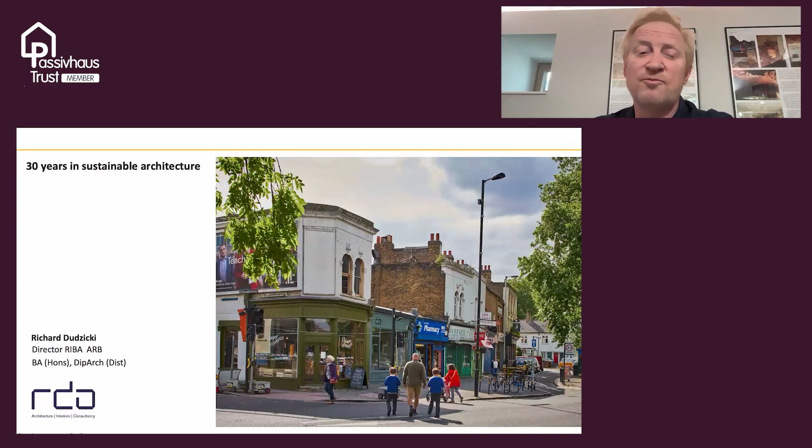We've been on our sustainable journey for the last 25, 30 years. I started building and working with the Passivhaus Trust back in 2011, 2012, when we built our first passive house. Before that, we were working with code level buildings in Harlow and so forth. So we had worked with sustainable buildings, but I hadn't really known much about passive house.

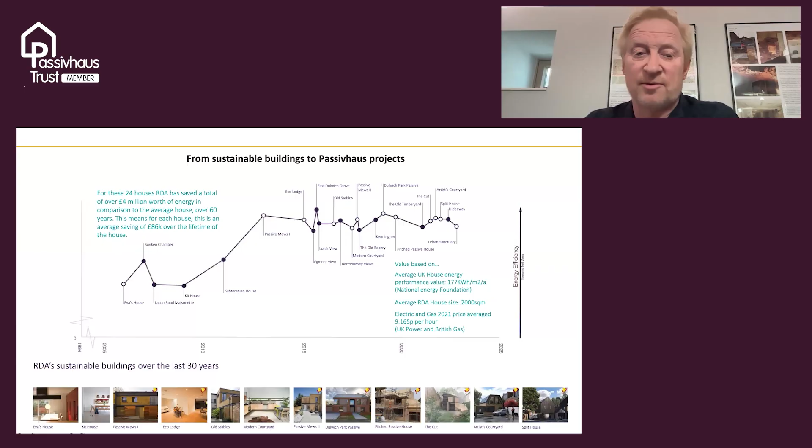When it came to building our own house, as our teenage kids were getting older and larger, we were rattling around in a 100 square meter home, a little bit less than that. It was too much when the kids were around 13, 14. So we decided to go on a planning journey with planning permission and make an application to convert our old offices, because we couldn't afford to move really, and that was the only building we really had.

I bought that a few years ago, and my daughter was born there actually. What we ended up doing was going on the journey of trying to convert that and make it a larger space. So that took a number of years fighting for planning.

Now, this slide is about EnerPHit. It's quite important about primary energy costs, and it's something I do believe quite considerable. A lot of our building stock needs deep retrofit. This particular office was derelict - it was really getting to the point where the roof was leaking, solid brick wall, and it needed a lot of work. Just working out some very simple calculations, we worked out that over a course of 60 years, we could actually save ourselves around £86,000 in energy bills by going for a deep EnerPHit project.

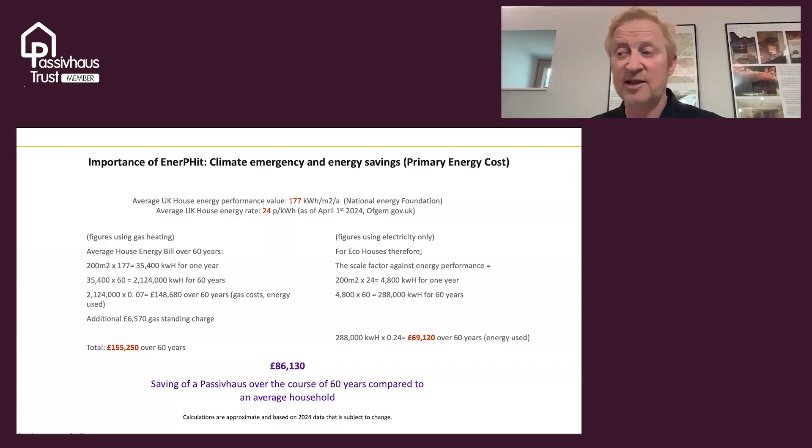An EnerPHit is different - it's effectively taking an existing building and converting it. One of the things that LETI, which is an organisation of consultants effectively, are trying to do is shift the peak of energy demand of the housing stock, in London or well, not just London, but all over, and trying to shift it over to be more ecological. It's something I wanted to contribute to, and also my partner and my kids, all of us were very keen on this. So it's something that the whole family embarked on as a project.

There's many trepidations with this. So what did we read about?

We looked at RIBA's Passive House Overlay, the RIBA - Royal Institute of British Architects - Climate Challenge, trying to reduce the energy, and LETI's Climate Emergency Guide and so forth. We were using this sort of literature to try and ensure we all had the same idea.

When I was a student, many years ago, I studied architecture in Liverpool Poly in the 80s. And I remember we used to go to CAT, the Centre for Alternative Technology in North Wales. It was very much a bunch of people listening to Pink Floyd sitting around composting toilets and so forth. But look at it now - there's definitely been a change in the ether and the air. Those pioneers did something - they did something to me as well, because it's something that I believe in.

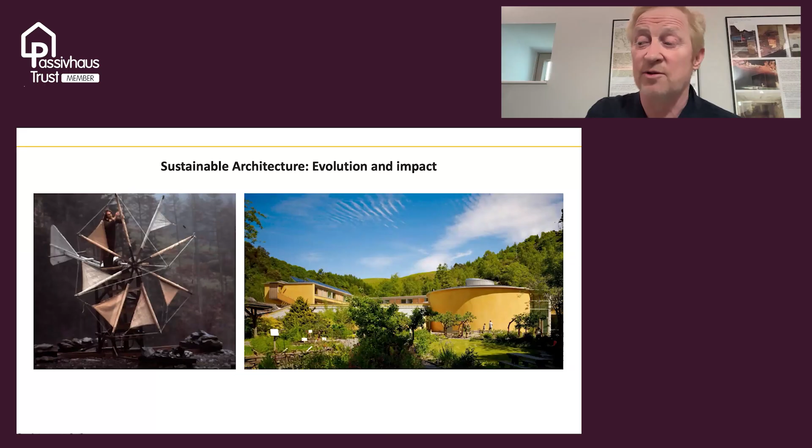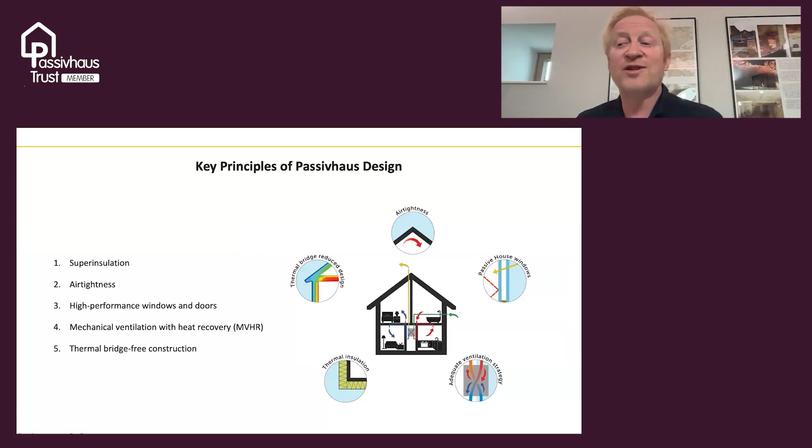So, what are the key principles of passive house design? Well, the key principles are: insulate your house well, make sure it's airtight, create and put in high performance doors and windows, include mechanical ventilation and heat recovery, and ensure you have thermal bridge free design. That means you effectively have a tea cozy over the building.

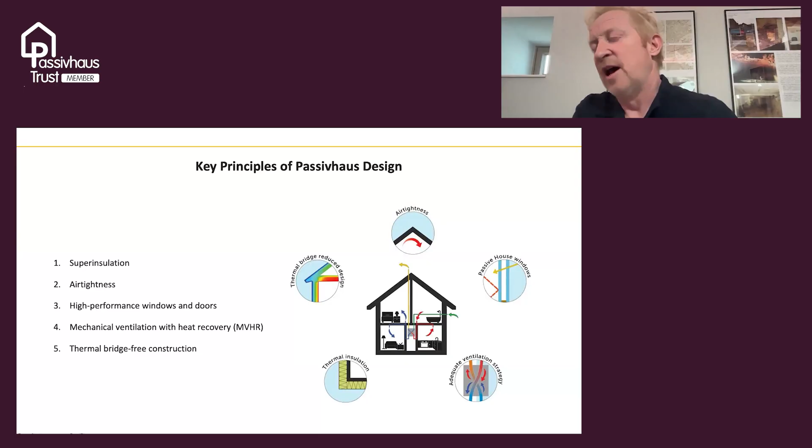How do you do that with an existing building? It's very hard, it's very difficult to do that. So you have to look at the existing building - what's the aspect ratio, how are you going to be able to do that?

The fact is, we had quite a lot of knowledge because we had lots of examples of how we'd actually done this before - we've done it since 2011. So we had a bit of a track record, and we were thinking about this building, just thinking how can we do this?

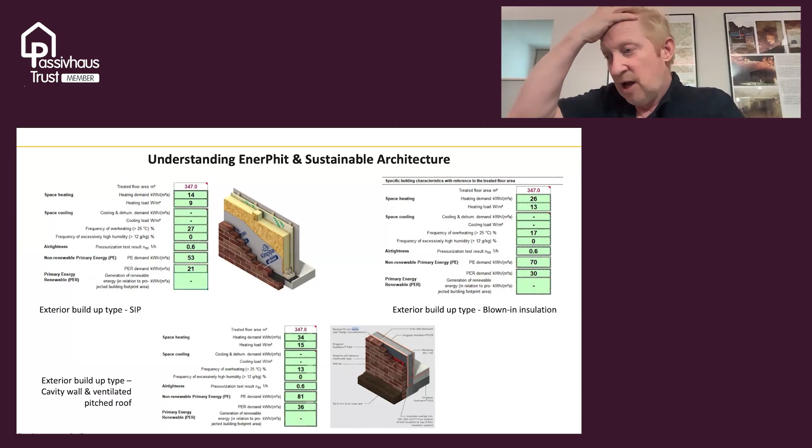Do we insulate the building on the outside? Do we do it on the inside? We started putting figures into the Passive House Planning Package, playing around with different ideas and different ways of how we'd go about doing this, putting in all the different aspects and playing around with costs too. How can we do this on a cost basis which is affordable for us? I mean, I wasn't borrowing a lot of money, and this was effectively a new home for us and the family.

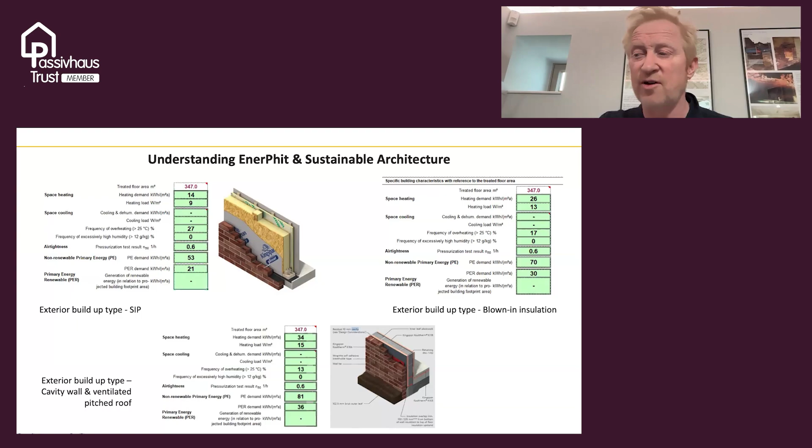So, common misconceptions - this is what builders put across, what people say to you when you start saying 'I'm building an EnerPHit house' or 'I'm building a passive house'. They say it's too technical. Well, it's not - you just need to use a consultant.

We work with some consultants called Ecospheric, who are fantastic, and we also work with a good certifier, a chap called Kim Mead from Mead Consulting. Working with the right people, talking to people from the Passivhaus Trust - it's easy, you just learn. 'It's going to cost a fortune' - that's a classic mistake, no, not at all. Not necessary - just talk and discuss it.

None of the builders we used had worked on Passive House before - none of them. We just talked them through it. And believe me, I did this all on direct labour, so I just worked with contractors throughout the process. I didn't use one main contractor - I used multiple different contractors for different stages of the work, just explaining it all along the way.

It takes too long - well, in our case, it did take a long time. It did take a long time because we started the build in December 2019, and then COVID came along. So it did take 2 years - it was supposed to be a 1.5 year, 18-month project, but it just took over 2 years to build. So it did take a long time, but in this particular case that was mainly due to COVID, not to do with building a passive house.

So where is the timber yard? As you can see from this site plan, the timber yard is located in a street block in Zone 2 of London, so it's sort of on the Peckham/East Dulwich borders. It's surrounded by 13 other buildings and a substation. You access the building towards the southwest, and effectively what you get from there is a long alleyway and a front garden.

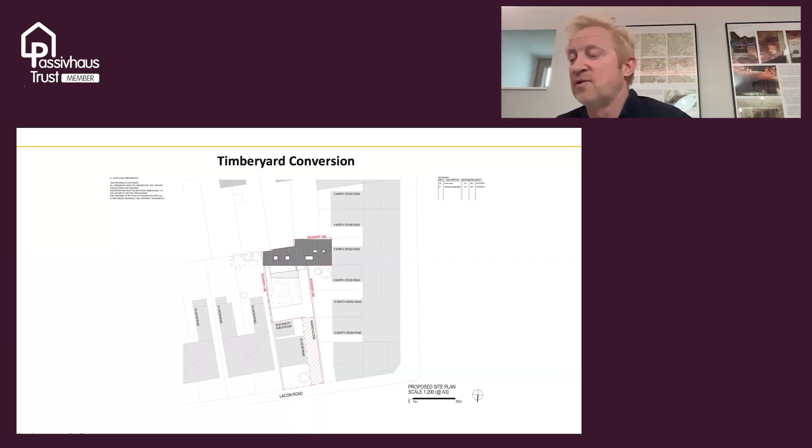You don't really have many windows at the back towards the north, so it's effectively a southwest, north-ish elevation. You don't have many windows there, and all the windows really face onto the front of the building. It's a long, narrow building.

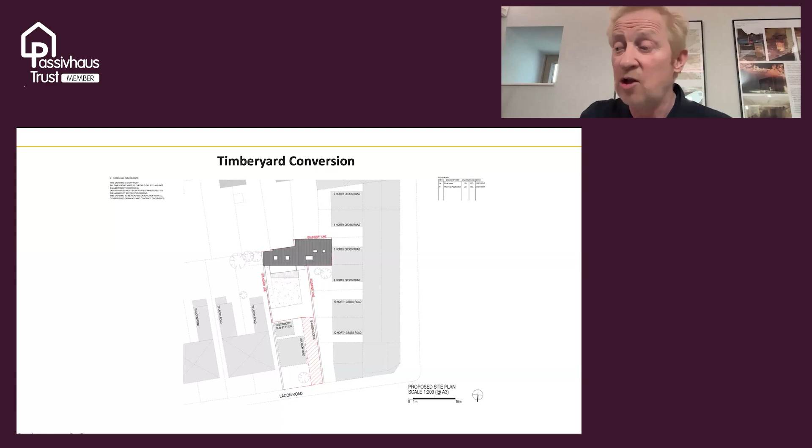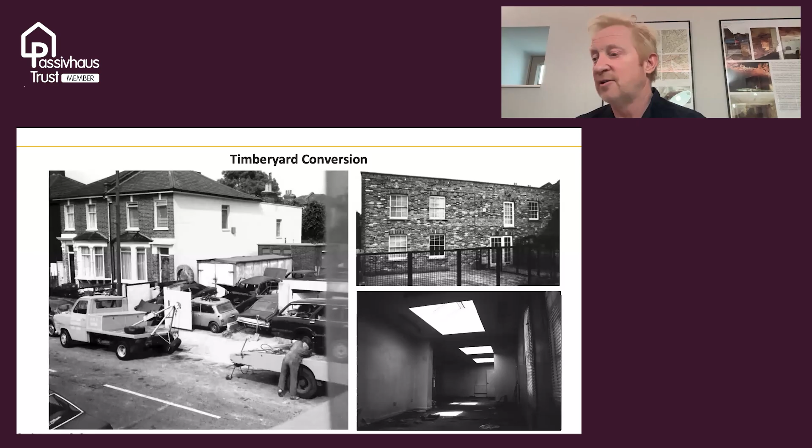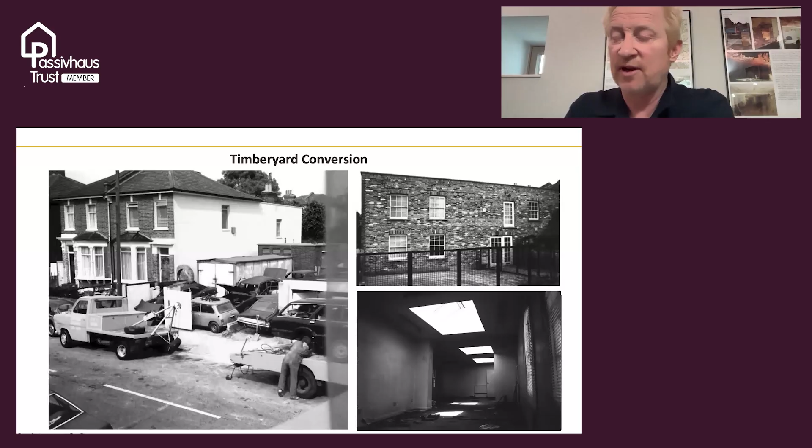That's what I bought back in 99, 2000 - that was the building I actually bought. It was a really difficult building to work with. We had to skim the site, and that became our offices - RDA's very first offices. We converted it on a budget. Where the scrapyard is now, at the front, and at the back we built another little house, 100 square meters, which we lived in, but it was just tiny, so we needed more space. The kids had grown up, but now some of them are moving back in with their girlfriends and boyfriends into our house.

Here's a brief history: the building was an office for a timber yard, then an office for a scrap yard, then it became offices. My daughter was born there, so we lived upstairs and the office was downstairs. We just changed the windows, but the flat roof was past it - it was really cold. Then in 2019 we effectively started work to convert it into an EnerPHit, which is the bottom slide there.

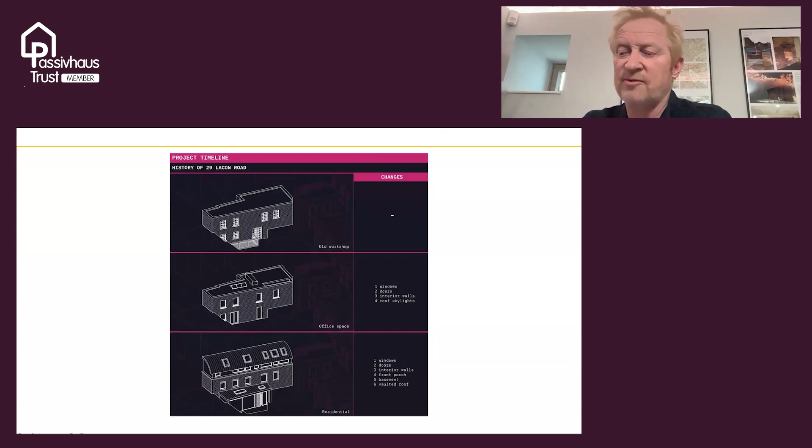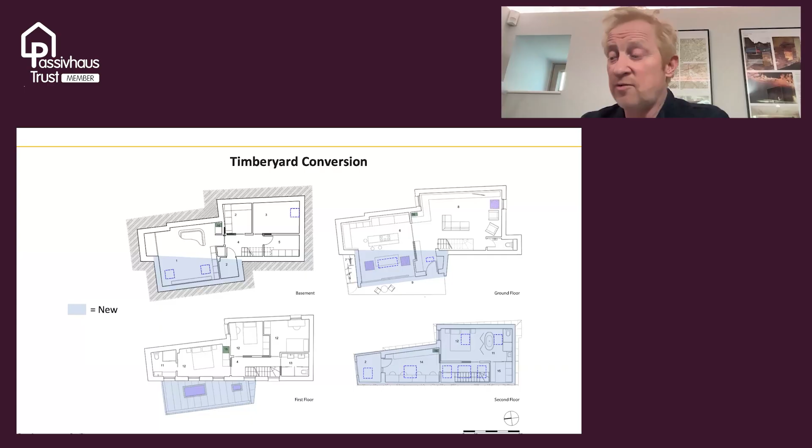So what space did we include and what did we increase? We created a small extension to the front of the building - shown in light blue - and we expanded the basement that was there. We had to underpin the building as well, as the foundations were too shallow, so we underpinned that. We also created the new loft space, so you can see what the additional space was.

Pretty much, it's a long, narrow building. So the form factor - what I mean is how economically the shape is designed - it's a long box, not a square box. So it's not that great from an insulative point of view and from a passive house perspective. But the fact that it's quite tall meant it worked okay - not too bad, but it worked all right.

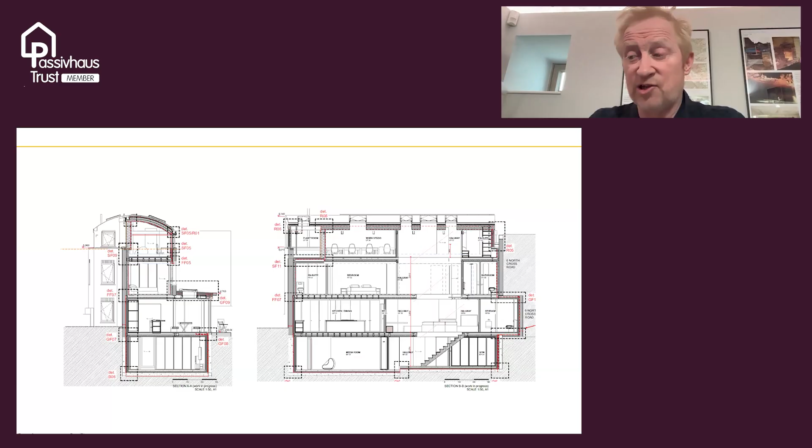So we did need to put a lot of insulation into the building. You can see on the details that the insulation went on the inside.

The elevations were designed, and the reason we chose a barrel roof, some of you may be asking why, was basically to maximize the upstairs space. We had a real issue with height - we couldn't go any higher than this, and we also had an issue with the eaves level. So to try and maximise a little more space, we used a curve, and that curve gave us more space in the upper rooms, albeit the windows are quite low towards the front.

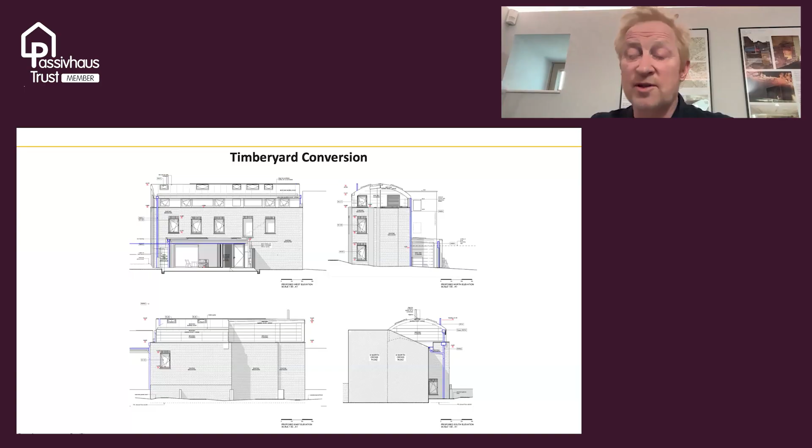In the studio, we ended up using roof lights - Velux roof lights, but Velux Passive House roof lights - for the airtight membrane.

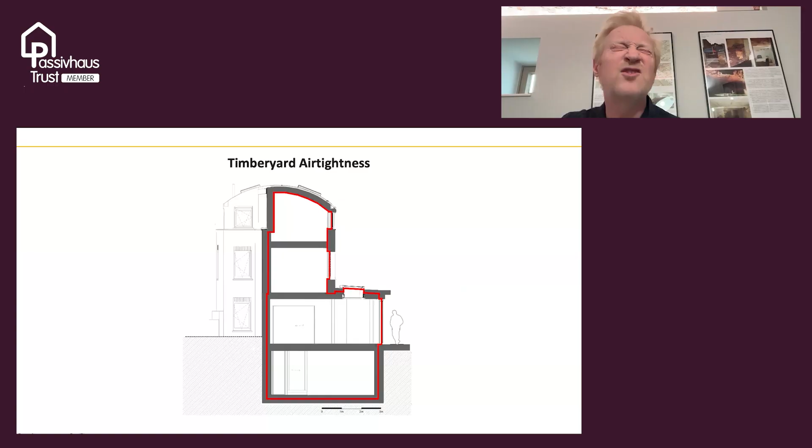How do you deal with this? Well, we ended up putting the airtight membrane on the inside of the building, on the inside of the brickwork - that's pretty much where the airtight membrane was. You'll see how it all lends itself, but it was quite a difficult task - probably the trickiest task in all of this, harder than planning, harder than anything else.

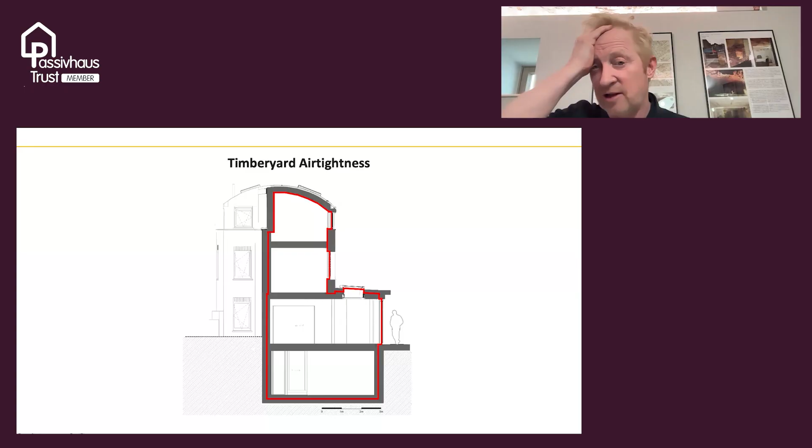So when we were thinking about this, we thought, my God, we've got to put all the insulation on the inside, like a tea cozy on the inside of the building, and at the same time we've got a steel structure going in as well. How do we deal with the details? Dealing with the details was very much about avoiding thermal bridging. So we had to start sketching the details out: how does the steel go into the brickwork, how do we separate it, how do we insulate it, what do we use to break this steel away from the existing brickwork?

So we spent a lot of time sketching out the details, working with these, and working in tandem with the engineers we had, which were fantastic - CTP engineers down in Sevenoaks. They were really, really useful, really, really nice people.

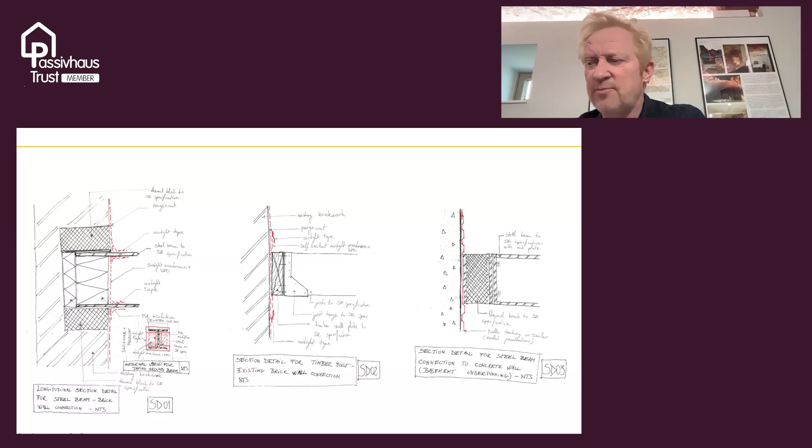This was all just before lockdown, and we were really trying to get as much information out as possible, but they were helpful.

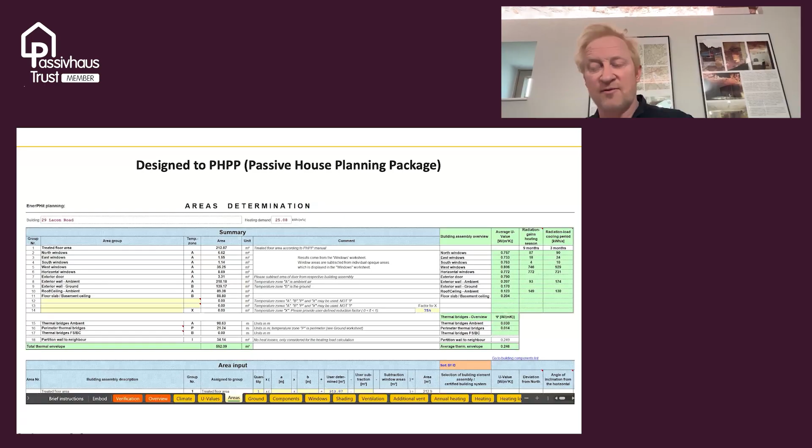At the same time, whilst we were doing all of this, even at early stages, we worked with the Passive House planning package, putting all this data into it. The nice thing is, because we do this day-to-day in the office, it's something we know about and can work with, and there's people here who can work with this. We were going back and forth with Ecospheric, working with them and with Kim Mead, the certifier, which was really quite helpful.

So we could test everything beforehand, which was really useful in making sure we could get this all done. At the same time, we were borrowing money from the bank, getting effectively a bridging loan to do the work until we could mortgage the building.

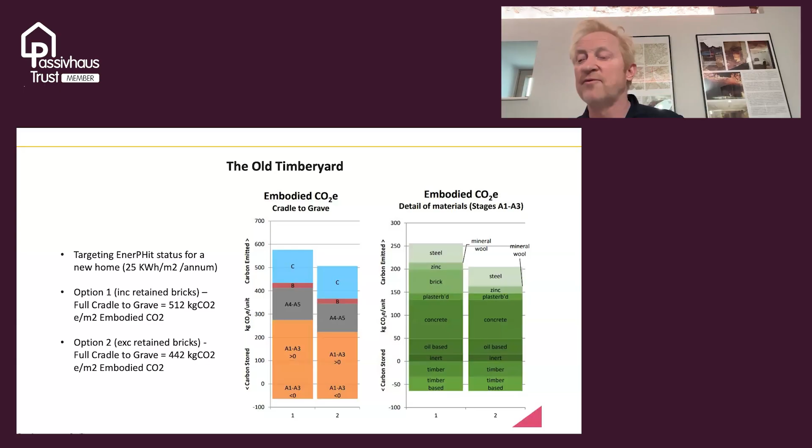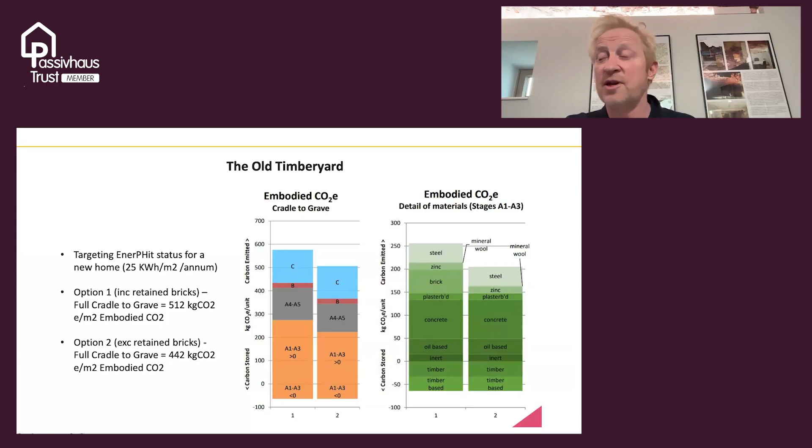This is a graph produced by Ecospheric, by Ben Riddle, and it was very much to deal with the embodied carbon - what was the embodied carbon, what were the savings. That was really interesting, that we were saving so many kilograms of carbon over a period of time, over a year effectively, in terms of retaining the brickwork.

So what was the concept? Well, the concept was very much putting a building within a building. So we kept the brick shell and then constructed a building within a building. Working on tricky sites, we were thinking, how are we going to get all this steelwork in there? That wasn't easy, but we managed to think about it and componentize it so we could carry it and bring it in.

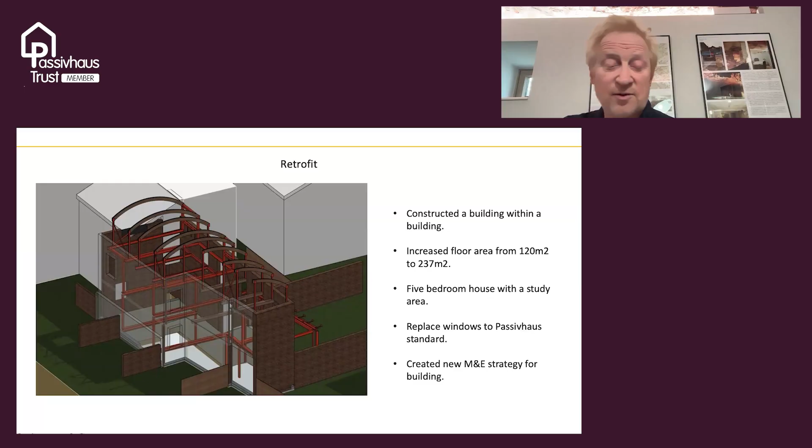Effectively, with the existing building, it was 120 square meters, and we were increasing it to 237 square meters, creating a 5-bedroom house. We were replacing the windows with Passivhaus standard windows, and we created a new mechanical and electrical strategy for the whole building - that's what I mean by M&E design.

We worked it out - my whole family got involved with the interior design. By building it all in 3D and having a 3D model of the whole project in BIM, Building Information Modeling System, we could play around with all the materials and everything else, and we knew what we wanted.

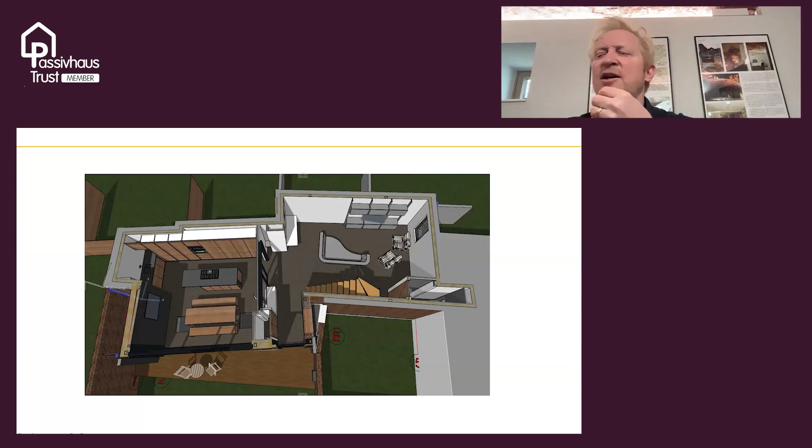One of the things that was really important for us was to try and limit the amount of VOCs. Both my kids have quite a few skin allergies, so it was very important to us to use lime render and items that were healthier. So it wasn't just about a passive house, it was also about healthier homes.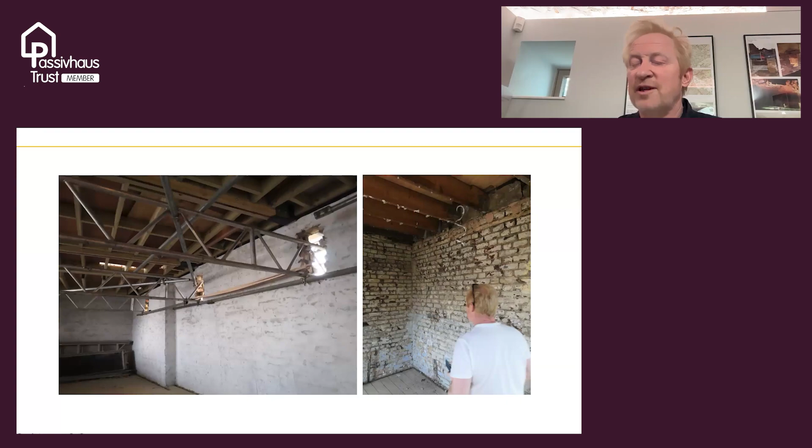So we started the work. We had problems - we've got 13 neighbours and we couldn't put the scaffold up around the neighbours to do the roof. So we had to break through the building, creating holes to get the scaffold through and cantilever it through the building to get the roof on, which we managed to do.

There you can see the brickwork - it's a solid brick wall, the brickwork of the existing building, which we'd covered with a parge coat. We'd done a parge coat of lime render on the entire brickwork to try and make sure it's airtight, and we'd fill those holes where the scaffold was cantilevered through at a later date.

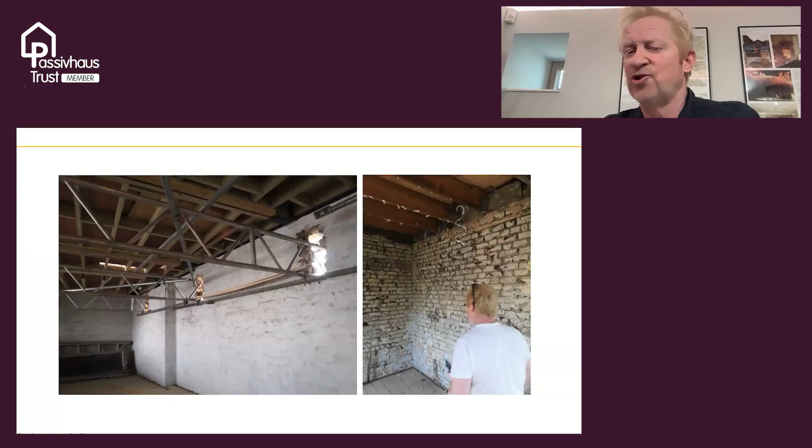That was the first real stage. And then we started thinking about working with the existing building and underpinning it.

Whilst underpinning it, we effectively cleared out some space in the existing undercroft and basement area, and we damp-proofed that. There you can see the delta membrane, the damp-proof membrane, because that's below ground level, so it also has to be insulated. That's where we didn't use wood fibre in the lower ground basement area, because below ground level it's tanked with a delta membrane, and therefore we didn't allow that to breathe.

But using the MVHR and the air circulating throughout the building, this building doesn't get damp, it hasn't got any interstitial condensation, and it works really well.

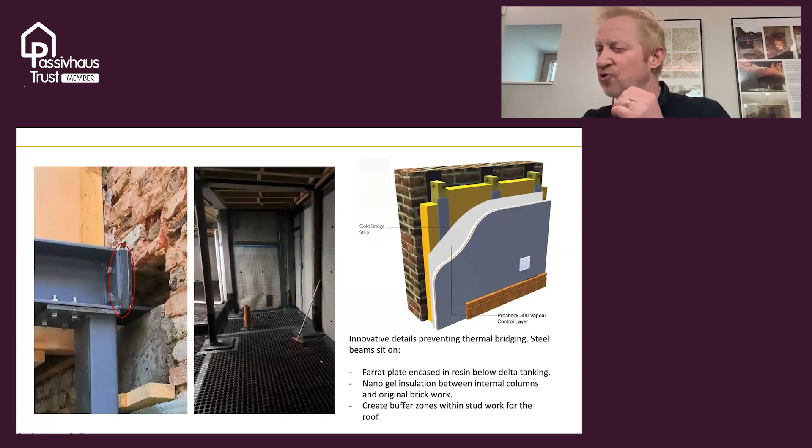One of the interesting things, as you can see, is the steel frame as it was going in is separated from the main building, and we used Farrat plates. We then used nanogel insulation behind that steel. Where you see that little piece of timber at the bottom there, that's where we used a little bit of nanogel insulation because the insulation on the inside is about 150 mil thick. And then the steel pads that go throughout the building are raised up off the ground on Farrat plates, so they again don't touch the ground. We were trying to really limit the amount of thermal conductivity that was in the building. You can see it in more detail there.

Then one of the things that's really important is that you actually think through how you're going to put the windows in. Now, this is an existing building, so what were we doing? Well, we were pushing the windows to the inside of the building. So the windows sat in a Winframer system, which we put onto the building, called the Isochemie Winframer system, and the windows then get pushed to the inside of the building.

We had a real problem with this, because when we took a measured survey of the existing building, we didn't actually look at the verticals that much. We thought the building was built perpendicular and straight. As you can see from the laser, it's not. The building leans in, it's a bit like the Leaning Tower of Pisa. So it actually causes a few issues with this Winframer system because the walls actually lean in slightly. So we had to fill that in a little bit on the inside.

So it's great, you know, in the catalogues and everything, it's great. But in reality, working with older buildings, I'm not sure if it's the best solution. Yeah, you live and learn.

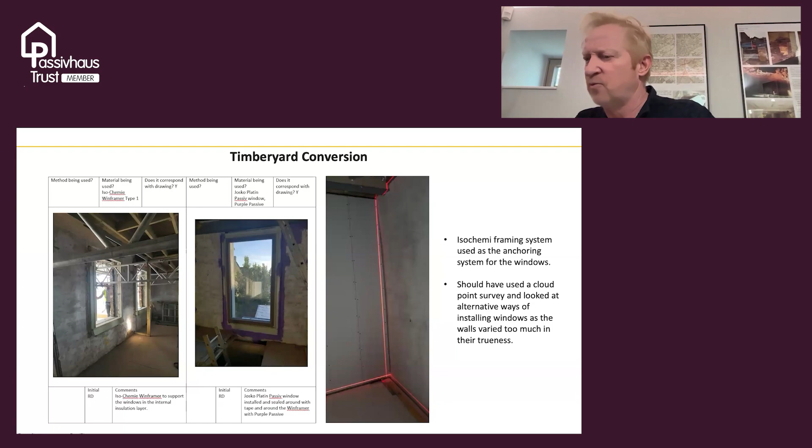So that's something. You can see there, the purple stuff around the window is us trying to seal the window and seal the window frame effectively in the Winframer system. That's called Purple Passive. And then you can see the parge coat there on the existing brickwork before we close it up. And we'd be doing air tests all along.

One of the things also to really think through when you're doing a passive house or an EnerPHit project is you've really, at the very early stages, got to think about your mechanical and electrical, your MVHR, and exactly how it's all going to work. So as you can see here, we've got holes in the steelwork, and the holes have got plates over them to strengthen them, because we knew exactly where the mechanical ventilation needs to go. So we could pre-think where the holes in the steelwork would be for the ducting to go. And that's really, really important.

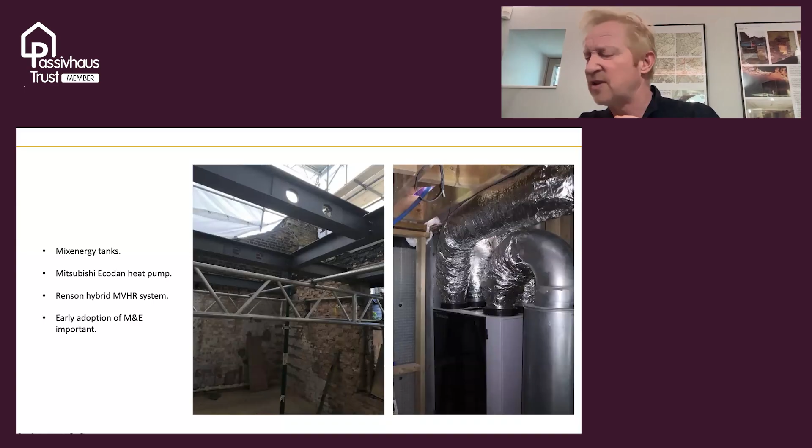And so we had a hybrid. We thought through where the ducting goes, where the stack is, and so forth. It's really, really difficult, and you've really got to think this through early, early, early, early.

That's my big message. What you see here is our data sheets. These are the data sheets that we were sending to our certifier, which show all the sort of technicalities that we were dealing with.

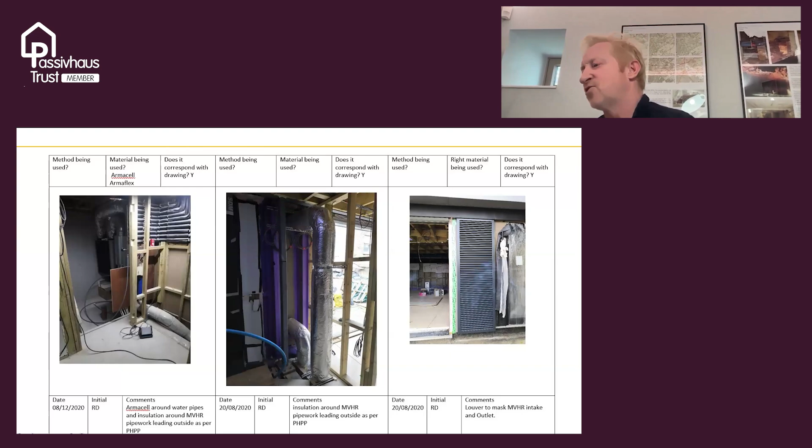As you can see there, as we were going up within the building, we were ensuring that all the pipes were covered with Armacell insulation, which is very good quality insulation. We were making sure that all the ductwork was covered and insulated properly, and at the same time, it was also airtight. So you can see all the Purple Passive being painted on, you can see tapes put on, and then you can see the grille that we actually put in specifically to deal with our MVHR.

Then came the steel frame and the roof. The roof actually came to be around March, April 2020, and we realised we couldn't get the glulam beams because lockdown occurred. We were working with less people on site, so we were working with one team at a time. And the beauty of it is the engineers gave us a solution for building these beams ourselves, so we built it out of plywood. We went to a CNC manufacturer just outside Croydon, and they were made out of plywood, glued and screwed.

And we created our own, effectively, glulam beams. It's just very much like a Wellington bomber. If any of you know about building or making aeroplanes, it's exactly the same sort of thing. I used to make balsa wood aeroplanes, and it's a very similar technique.

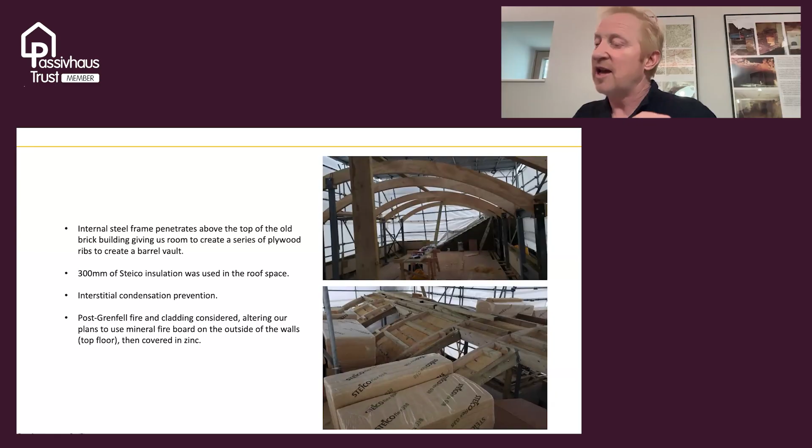We filled it with Steico wood fibre insulation. That's quite a thickness, 300 mil. But what we did was stagger it over the entire curve of the wall and the roof. By being staggered, it meant the air gaps would be covered, so we didn't have any cold spots for condensation to occur, or any air leaks, effectively. And you can see there how the roof was actually constructed.

And the plywood was very thin sheets. So we used two sets of thin sheets of plywood to get the curvature on the rib. You've got the Steico insulation, then the rib, and then you've effectively put the thin sheets of plywood. And then that was covered by zinc, a zinc roof.

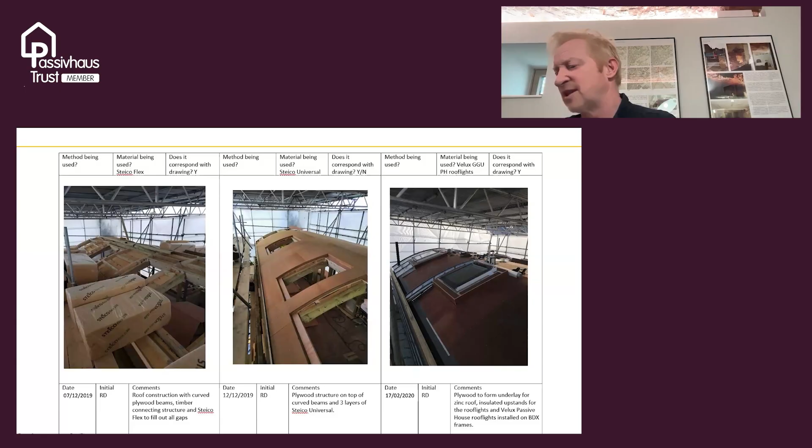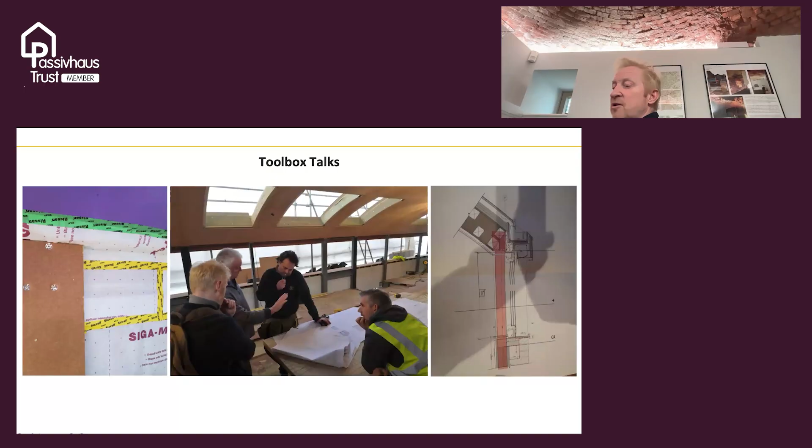But this is one of the most important things: toolbox talks. You have to have toolbox talks with your builders. The builder on the right is a chap I've been working with for the last 15, 20 years. He's never built a passive house, but I was talking to him, explaining these are the different airtight tapes we use, and this is how to connect the roof to the wall. On the left-hand side, you can see a tricky detail and how much tape and membrane we used.

It was considerable. If I was doing this again, I'd probably use less. I sort of over-engineered it a little bit here, so I think I overspent a bit on too much tape. But at the same time, you've got to get the right tape for the right scenario.

So it's really important. We had all these different tapes and boxes on site. I remember coming along one day and seeing gaffer tape being used, and I was going, what the hell? We've spent a load of money on this tape, and then gaffer tape's being used. So again, going and talking with your builders is really, really important.

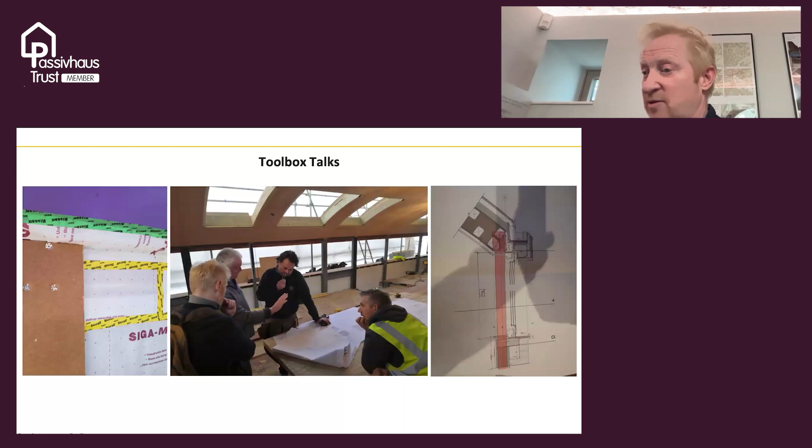So I've got the builder on the right-hand side, and I've got the roofer on the left-hand side. We're looking at the details, looking at the air tightness, and discussing what we need to do. It's the easiest way, talking through what you need to do.

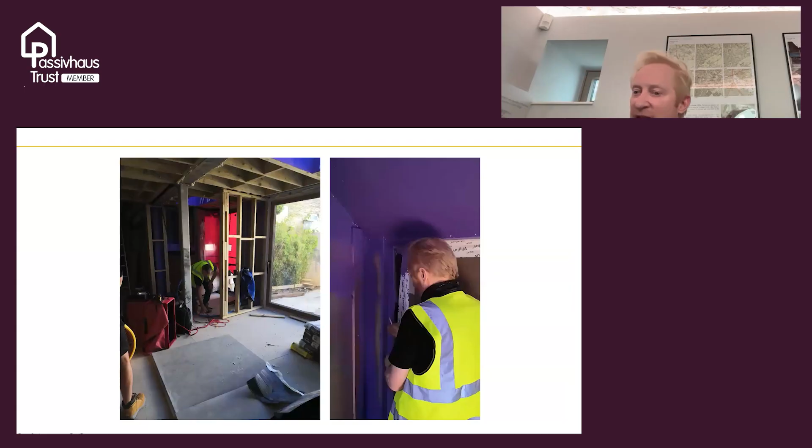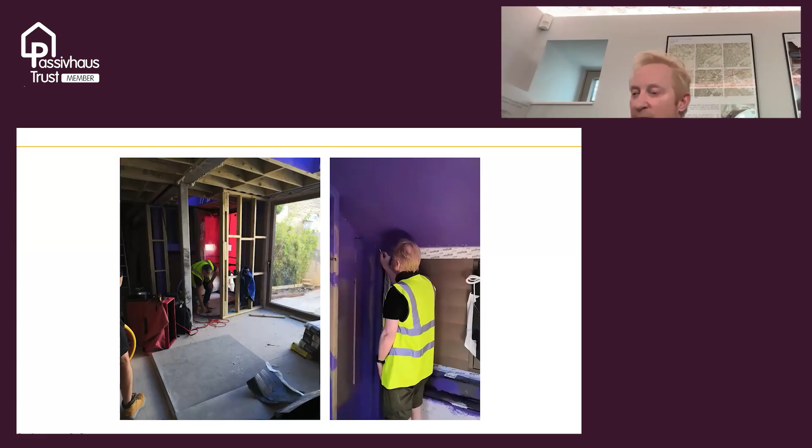Anyway, moving on from the tapes, the next thing was air testing. As a standard, with any contract, even working with different people, I use a minimum of 3 air tests per every single EnerPHit project or passive house project we do. The first one is without the windows, the next one is with the windows, and then we do a final test.

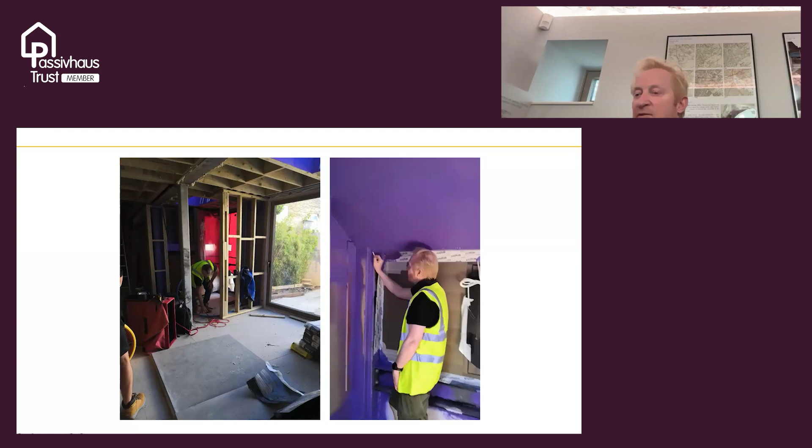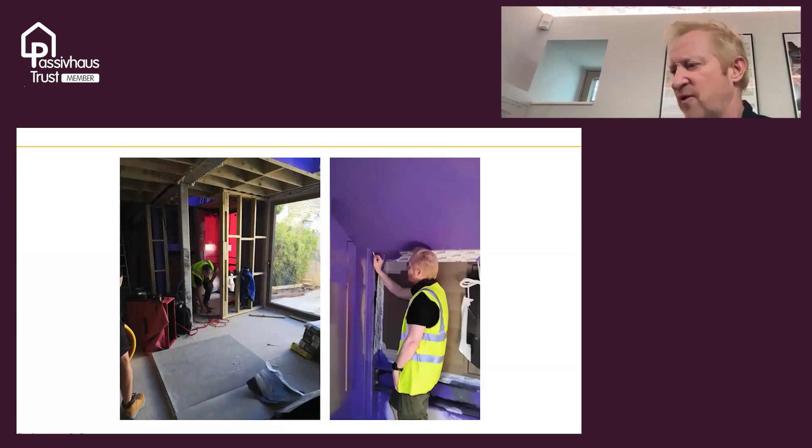What's really important, you can see in my little video, I'm going around with a smoke pencil, seeing where it's leaking before we close it up fully. So we can deal with this at an early stage. Why is it leaking? What's wrong with it? We can actually deal with that before we close it up. Imagine if that was closed up with plasterboard - well, we didn't actually use plasterboard, but cement board - if that's all closed back, you'll never find that little leak.

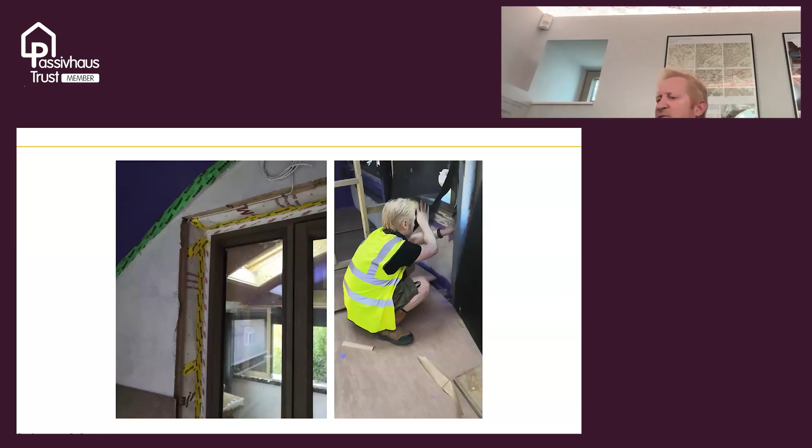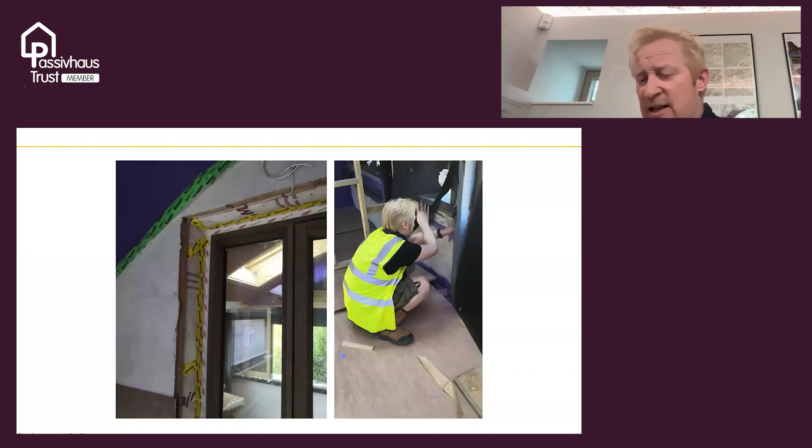Again, one top tip: if you look at the photograph on the left-hand side, I've left the windows, and around the windows, I've left all the tape exposed before we closed it up. What's the reason and rationale for that? Exactly the same thing - so you can see where the leaks are, see if there are problems, and test those problems to see if there are any leaks.

And when you're doing the air test, pressurizing or depressurizing the building, you can see where it's leaking and where it's not leaking. We can deal with it straight away without it costing us a fortune. That's such an important aspect of working with a passive house.

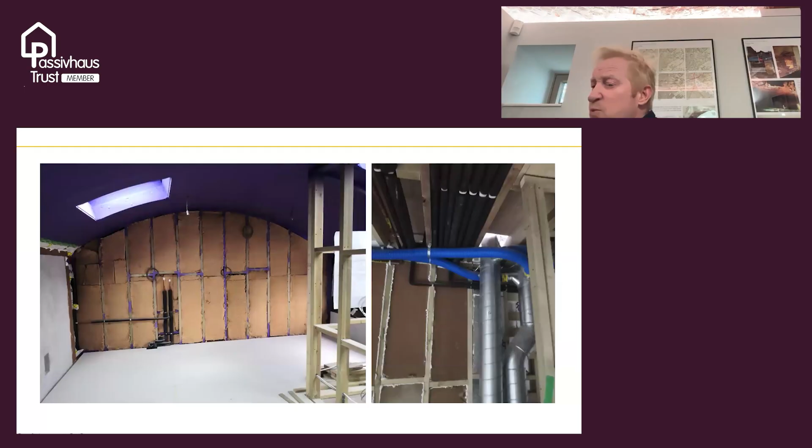Here you can see an end wall, and we used wood fiber insulation. We were trying to use as much wood fiber with a lime render as possible, so the water vapor could permeate through, but the building was still airtight.

This stuff is an absolute bugger to cut. It's really hard to cut and work with, to get these batts in very easily into these spaces. So what we ended up using was an airtight foam, which isn't necessarily the best solution. If I did this again, I'd probably use a different system. You can see on that wall the Steico boards, and the little gaps. We had to use an Illbruck airtight foam around those to make sure they were tight and airtight.

There you can see the hybrid system for the MVHR. We've got the big ductwork running in the riser, and then the smaller ductwork coming off the big ductwork going to each individual room with plastic pipes. We've also got silencers and so forth on that.

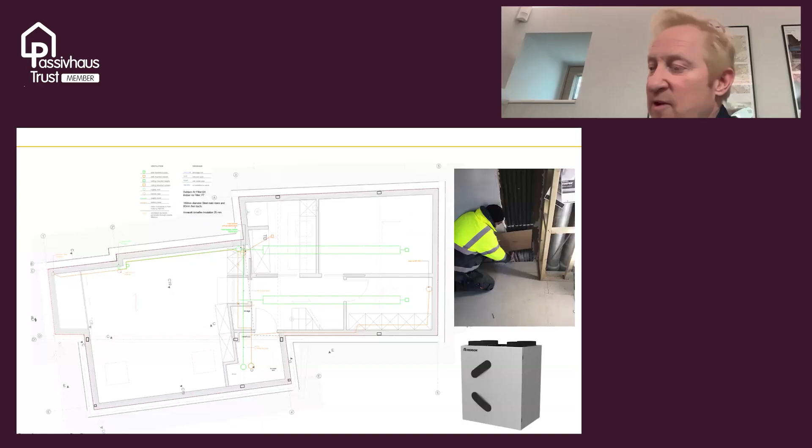One of the things that was really difficult was working out the risers. We thought we had plenty of space, but by the time all the insulation and the Armour seal came into play, along with everything needed for Passive House, that riser space became so tight. The builders wanted to kill me because we didn't have a lot of room to maneuver within the riser space.

Again, this is something I found working on an EnerPHit project - I would highly recommend working with certified products. If you work with certified products, you'll find that through PHPP, the Passive House Planning Package, it works much easier and you'll have a lot more data. So we tried to make as many of the products we used as Passive House certified products.

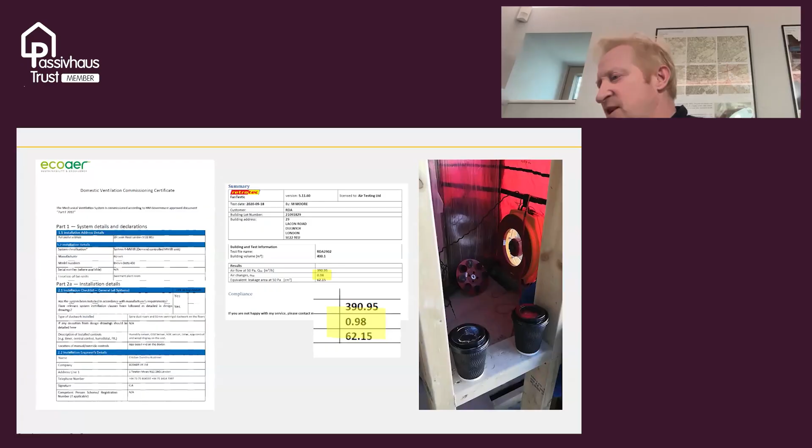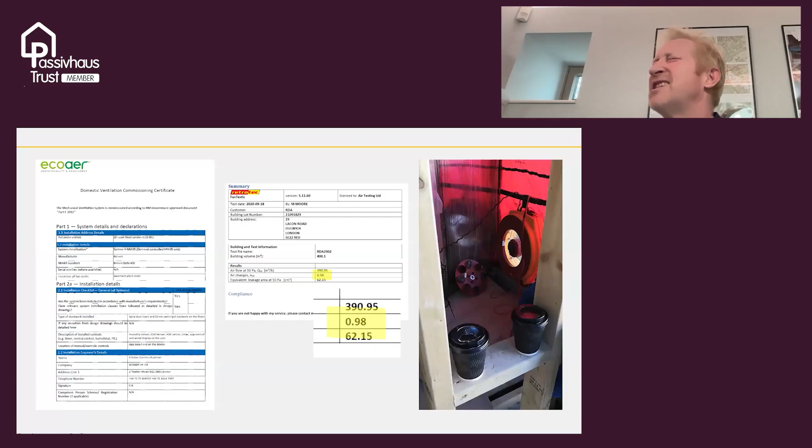So that's quite important. Again, more air testing. You can see from this, we were doing these air tests multiple times, three times, and we managed to get it down to 0.98. 0.98 is really good for a Victorian building - building regs is 10 air changes per hour. So this is fantastic to achieve in an existing building with a curved roof.

We had to move in very quickly because the bank was asking us to change it to a mortgage. So we had to cash in our loan effectively to a mortgage, which we managed.